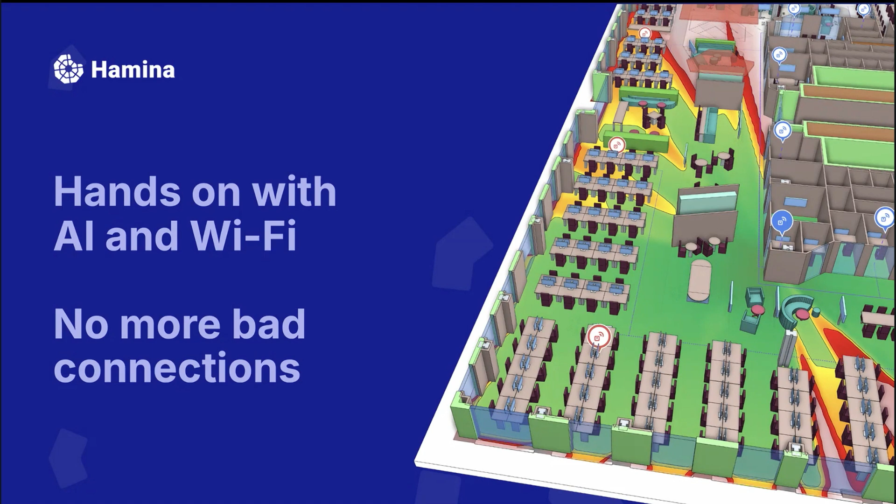We'll quickly talk about why it's so difficult to make really good Wi-Fi. Why are we seeing bad Wi-Fi? And a couple of tangible examples on how AI can help.

All right. Thank you for joining the ride. My name is Jussi. They call me Jussi, the Wi-Fi janitor. I hope you enjoy the show.

All right, so here's the good news. Wi-Fi almost always works. The Wi-Fi standard is very resilient, and that's why at your home, Wi-Fi typically works absolutely fantastically. So if you deploy Wi-Fi at your home, even if you deploy it kind of badly, against the window, or just tape it to the ceiling or under the desk, or just leave it in the closet, it works to some extent, right? Even at your home it can be bad, but home Wi-Fi is very easy, right?

But at your, let's say, local airport or hotel or hospital or warehouse, Wi-Fi can be really bad, and it can be catastrophic if the Wi-Fi is bad. At your home, maybe Teams cuts off, but if Wi-Fi fails at a warehouse, the warehouse pickers, whether humans or robots, don't pick up the stuff from the shelves anymore. Your deliveries don't arrive. So it's a bit more critical.

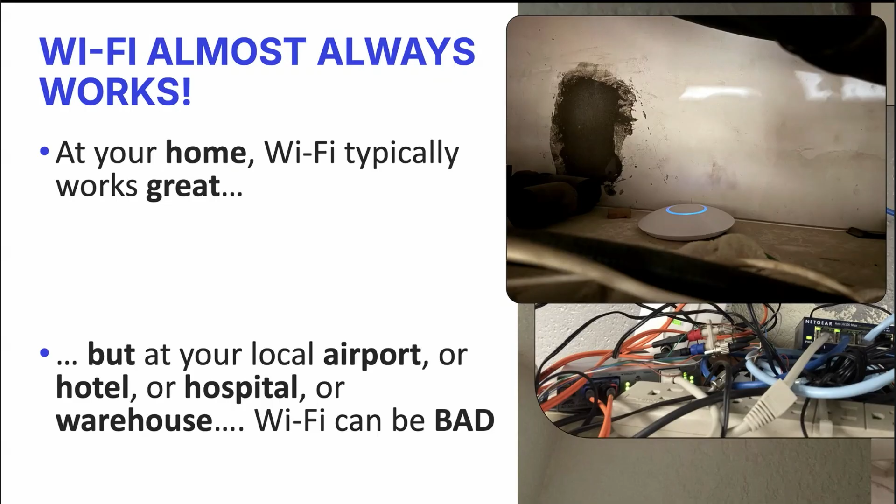And this is an actual picture. I was at the Canary Islands just last week, and this is what I found in my hotel. I could see access points nearby, but I couldn't really see them physically. Turns out somebody had put them inside the false ceiling and mounted them the wrong way as well. So that access point is radiating to the floor of the next floor and to my floor's ceiling. That's a true story from 2 weeks ago.

This is a bit earlier, a year or two ago, from Heathrow Airport. There's an ancient, like 2005 Aruba access point behind the television. Of course, radios and metal don't exactly match perfectly. So besides silly installations, what is it that makes enterprise Wi-Fi, larger than home Wi-Fi, struggle?

In general, the challenge is the larger the Wi-Fi network, the worse it typically works. A couple of causes: coverage holes is obvious. You need a lot of radios, like in hotels, hospital campuses, university campuses. You need hundreds, probably thousands of radios. You need to figure out where to place them, how to configure them. That easily causes coverage holes, especially if you're on a tight budget.

The other one is interference issues. Here's the bad news: your Wi-Fi network interferes with itself. Especially with today's Wi-Fi, Wi-Fi 7, Wi-Fi 6, the access points often are pre-configured from the box, especially home access points, to use really wide channels, just so that you can see that big number on your speed test.

But wide channels also mean a lot of interference when more and more Wi-Fi access points arrive in the area, whether it's more of your access points or your neighbors. If you're optimizing for huge speed test results, you're typically optimizing for a terrible user experience, because you're also seeing the most interference because of those wider channels.

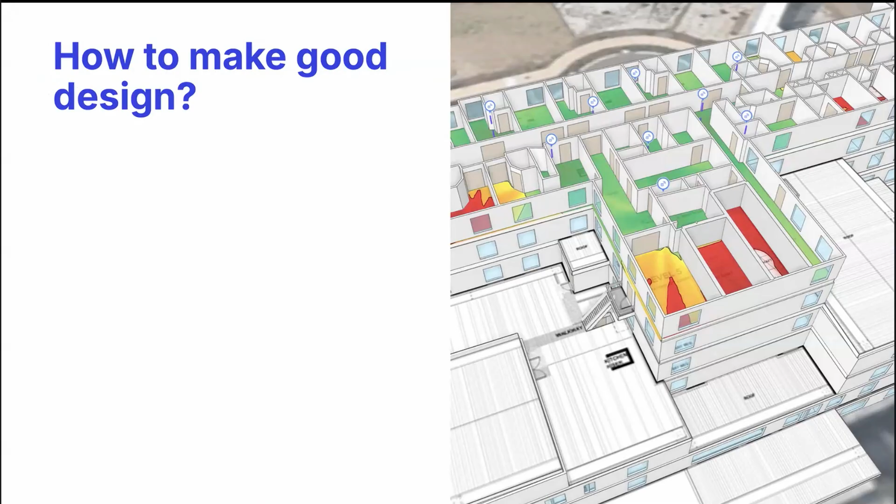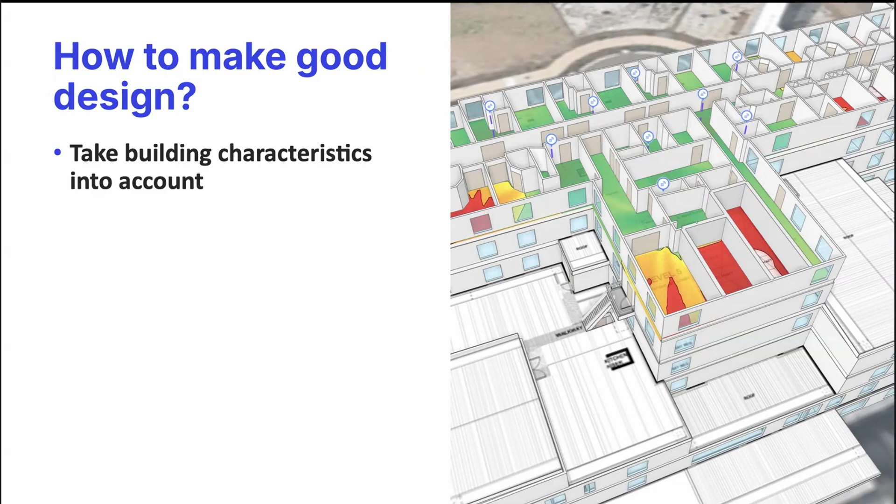So how do we make a really, really good Wi-Fi design? Simply put, we really take the building characteristics into account. So the walls and the elevators and the doors and things of that nature. And then we find ideal access point placement, so to maximize the coverage, minimize the interference, ensure capacity, and minimize cost. And then we appropriately configure and tune the network.

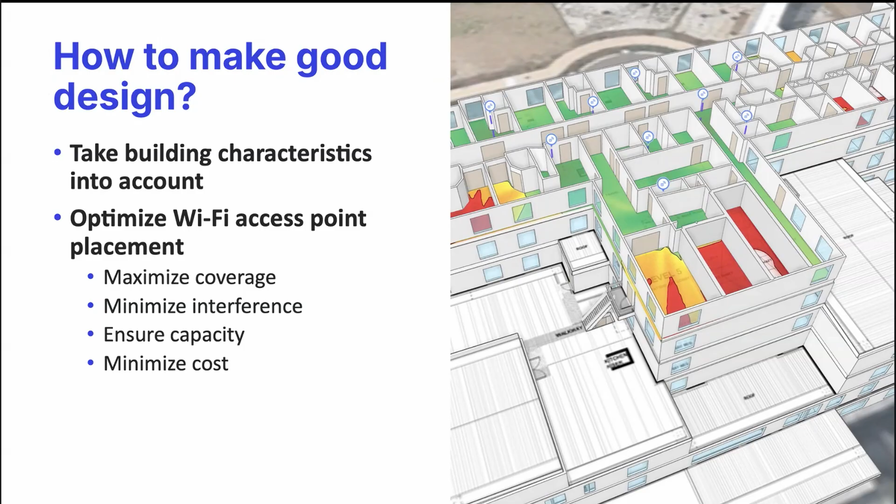Finally, we hopefully also validate the network on site. So we go on site and we make sure, doing walk testing, that the entire network works. All right. So this was the day in the life of a Wi-Fi engineer, still in 2024. Remember, we're talking about AI today and how AI can help. And AI did not really help a Wi-Fi engineer in his Wi-Fi design before 2024, not really at all.

So let's take a look at a couple of years ago. How did the Wi-Fi engineer do a design? You had to find some kind of floor plans of the facility, set the metric or feet scale to the floor plan so that we understand how much is 10 meters or how much is 35 feet on the floor plan in order to understand the coverage areas of the Wi-Fi access points. Then you had to use a computer program to manually draw all the boundaries on the floor plan. And this took hours and days.

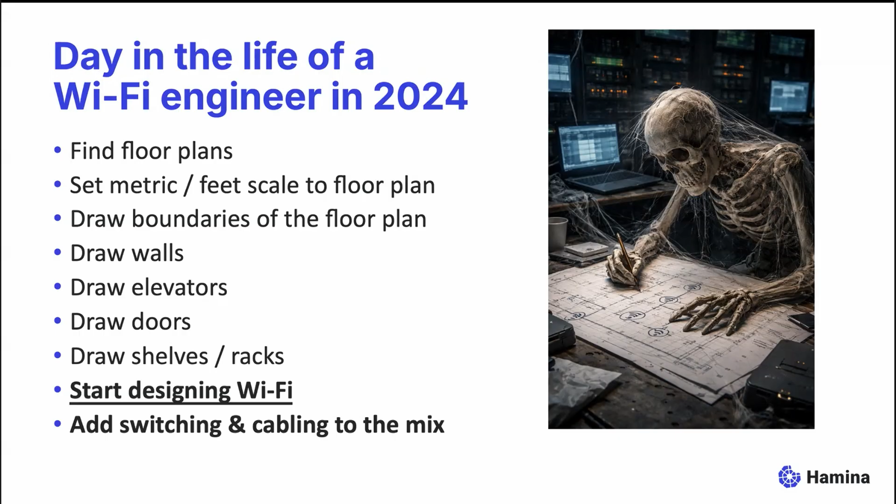So you had to draw walls of the area on top of the floor plan, and elevators and doors and shelves in warehouses and retail, and staircases and all of that kind of stuff, and define the materials for each. And only then maybe could you start designing Wi-Fi. This is hours and days later. Most of the Wi-Fi engineers' time went to these non-Wi-Fi related tasks. That doesn't make any sense. But then they could start designing Wi-Fi and the switching and cabling to match. Well, how can AI help here? Let's take a quick look.

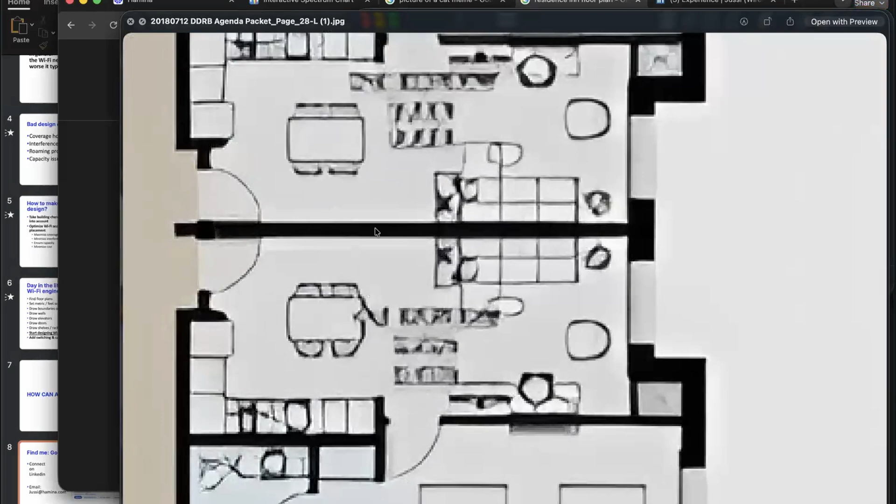All right, so let's take a look at some kind of a Wi-Fi design. So I went online and just put in Google Images "Residence Inn floor plan." All right. So this is what I found. Since I'm a Marriott guy, let's go with a Residence Inn. Let's say we need to design a network for Residence Inn by Marriott, and all we have is this advertisement grade, terrible quality floor plan of the building. So this is probably some kind of an advertisement floor plan or taken from somewhere. I don't even know, but it has nice logos and everything.

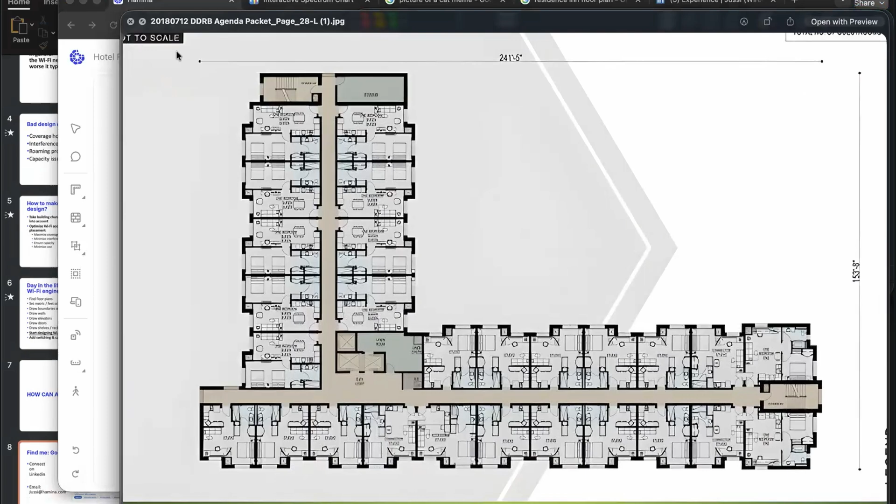But using this floor plan, in let's say 5 minutes, we would need to design decent quality Wi-Fi for this hotel. How would we go about doing that? Again, remember those manual steps that we had to previously go through. Well, luckily things have progressed. Let's see what AI can do for us. So here's the downloaded floor plan. I'm just going to take that and drop that on my web browser canvas, okay? I hope you can still see it. I'm just maximizing my web browser.

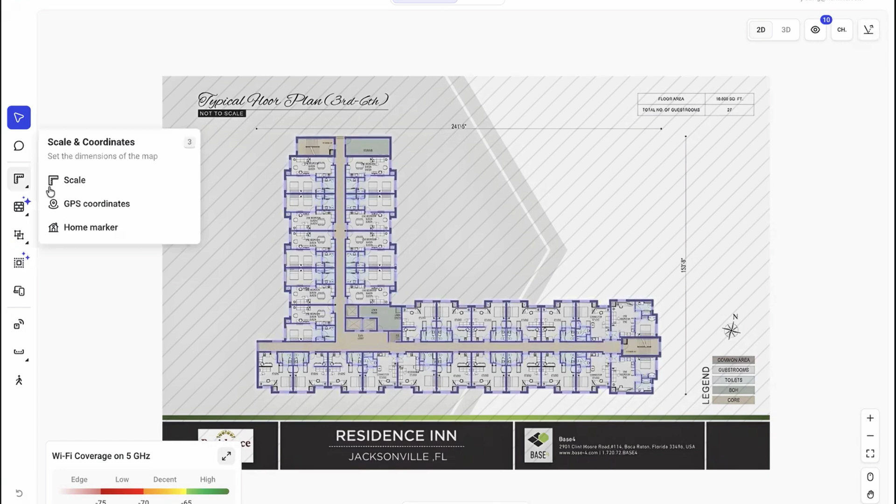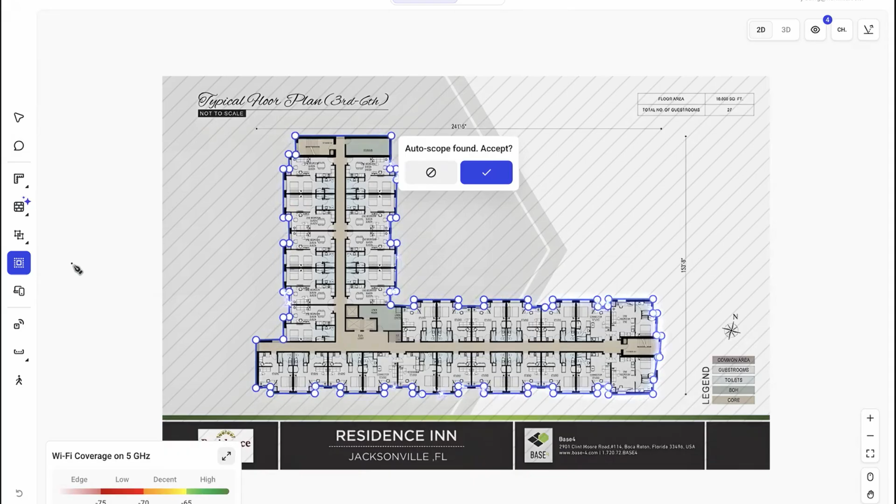What else did AI do? For Wi-Fi design, it's nice to understand what areas should I cover, typically inside of the building, and what areas not. Well, AI also did that for us. So that helps in understanding, like, the system will not even show coverage outside the building.

So your reports of the Wi-Fi design will look great. The heat maps will not show outside the building, things of that nature. So AI did that for us too. We call that a scope, like what's in scope, what's out of scope. You can of course manually edit that as well. For example, if you want to exclude the elevators from the design, we could do that too.

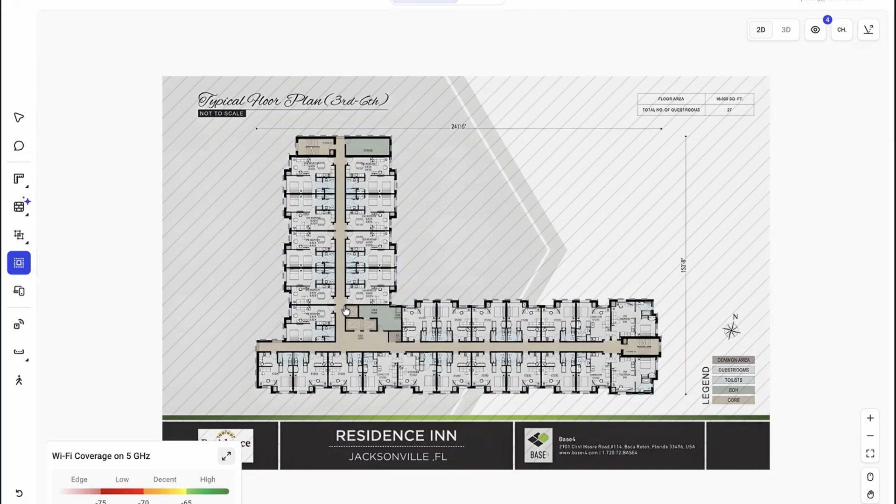Let's just do that for the fun of it. I'll just exclude them. There we go. The elevators are now excluded as well. So outdoor areas excluded by AI, and I manually excluded the elevators and did a terribly sloppy job at it. What else did AI do now? Okay, let's take a look.

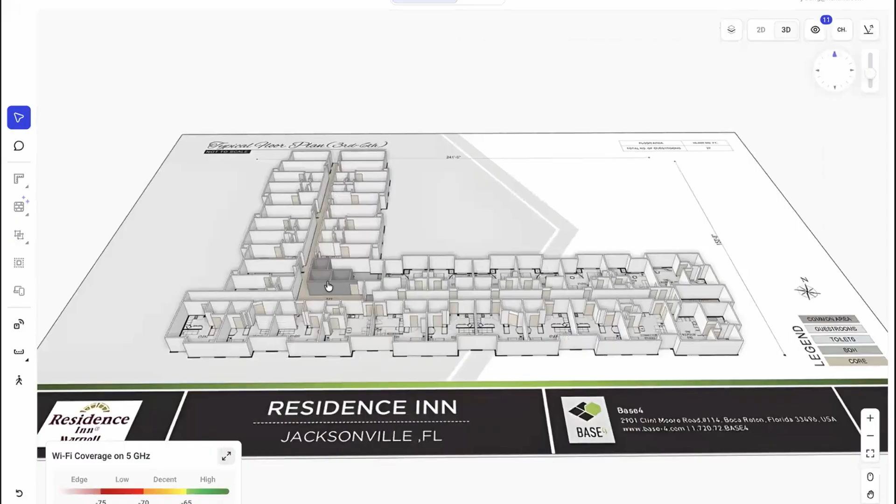AI actually also gave us the walls, the elevators, the doors, everything. And this is the holy grail, right? When we understand the walls of the building and the elevators and things like that, with this, we can then start to estimate what is the true coverage of, let's say, a Juniper AP45, which, by the way, radiates Wi-Fi into different directions like this.

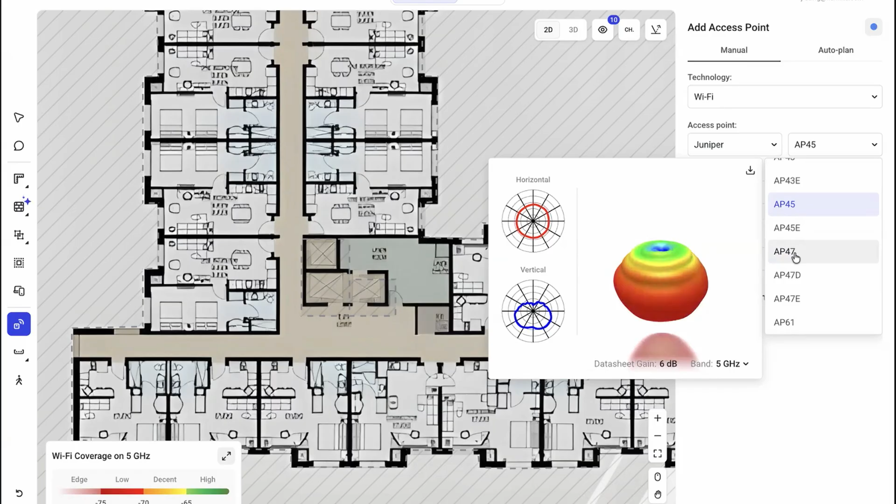Or the brand new AP47 from Juniper, which is more directional towards down than the AP45. Either way, let's take AP47 since that's newer. Now, look at how the Wi-Fi does not really penetrate the elevator, but it goes nicely through the corridors. It also goes through the drywall between the rooms quite nicely, but not nearly as much as in the corridor.

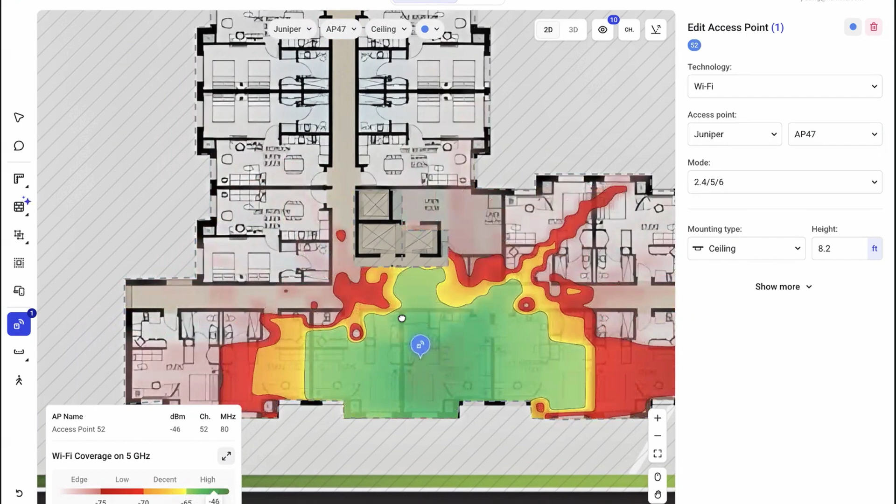And if we move the access point to the room, you can see how the walls make quite an impact here, but not as drastic of an impact as the elevator. Remember, we scoped out the elevator, so we don't even show signal there. If we want to bring the elevators back and see how the signal is in the elevator, we can certainly do that too.

All right, so see how much AI helped us here. It did the scale, what's in scope, it did the walls, the doors, the elevators. Could we now use this AI data to also make a decent design out of this network? Okay, let's ask the system. Typically, these kind of hotels would be done access point in every room or access point in every other room, or kind of a mixture, sometimes every room, sometimes every other.

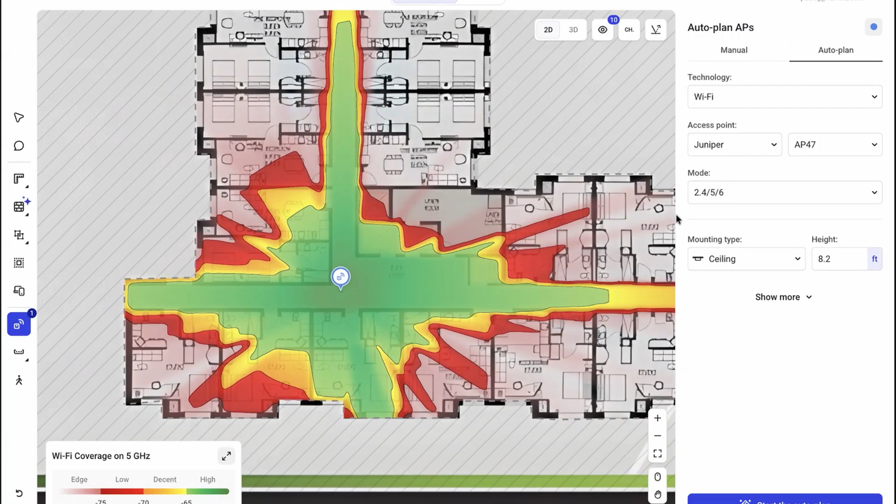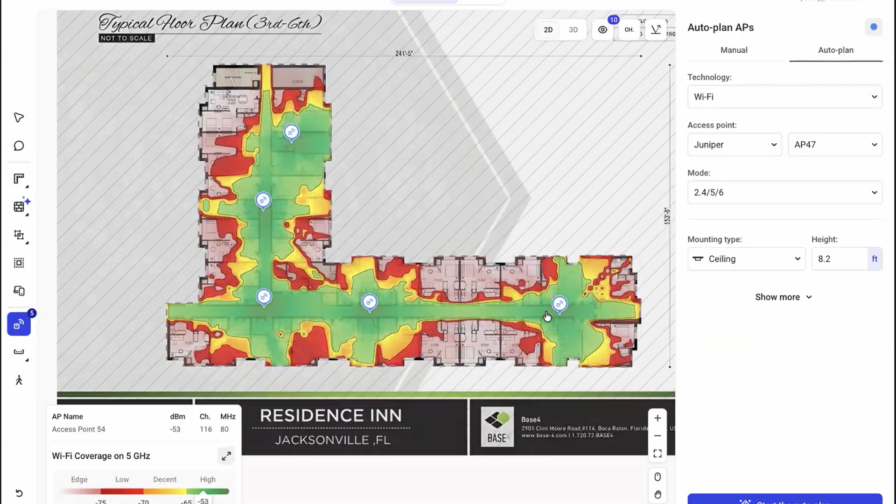Sometimes you see, I was just again in South Europe and I saw a design like this in my hotel. Some of the access points were in rooms, but most of them were in the hallway. And see what happens when you place the access points in the hallways. They don't really reach the rooms. So the Wi-Fi works great in the hallway, but it doesn't penetrate the walls to get to the rooms almost at all. That's not great, is it?

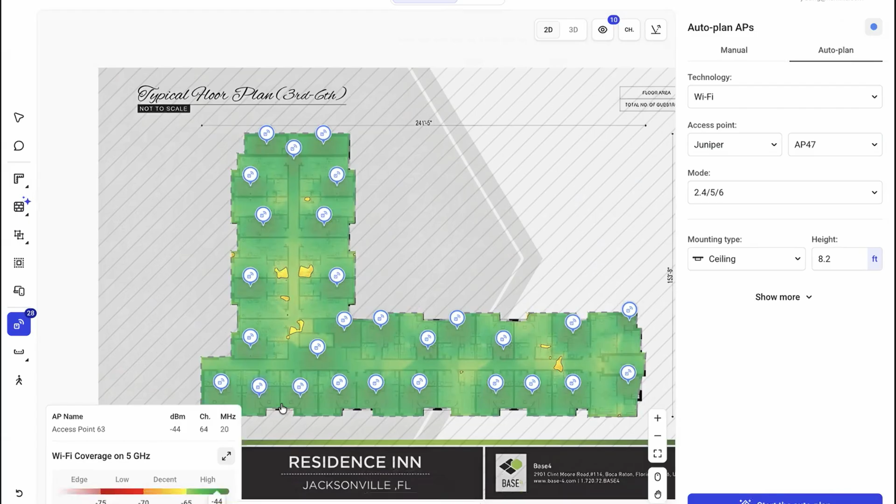Let's ask the system to suggest something to start designing the network. That's not bad at all. So, like I said, typically hotels are one access point every room or one access point every other room. And check this out. Let me just hide the heat map so it's easier to see. That's not a bad design at all.

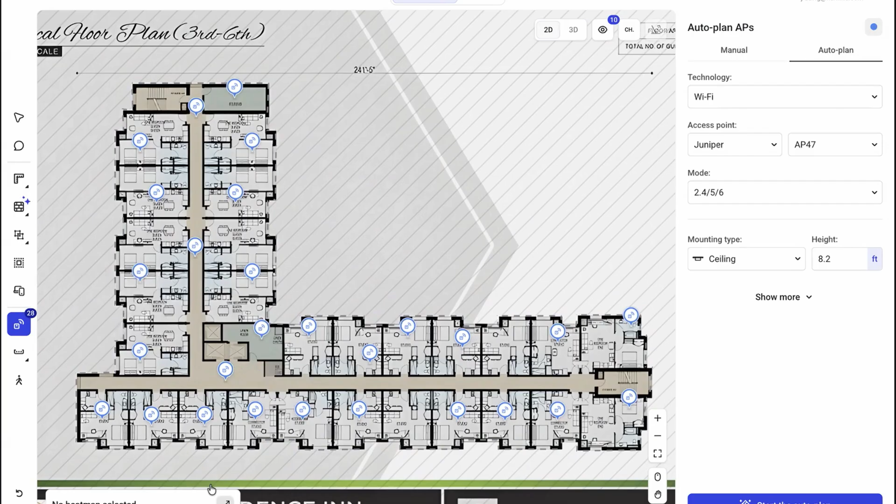And then we can, of course, manually modify the design. Let's say I want one in the hallway and I want one there when people get out of the elevator. Maybe move that access point there. But that's actually a decent starting point for us. Okay. So since AI helped us understand the building characteristics, it helped us make a pretty darn good design, okay? And then we can ask, do we have good coverage?

We do have good what's called primary coverage. So the best serving access point works great. Second serving access point works great, except in elevators and in some toilets, things like that. Not overly concerned about that. It's looking great even for the second serving access point on all Wi-Fi 6 and 7 on 6 gigahertz, and 5 gigahertz and 2.4. 6 gigahertz is only available in Wi-Fi 6E and Wi-Fi 7.

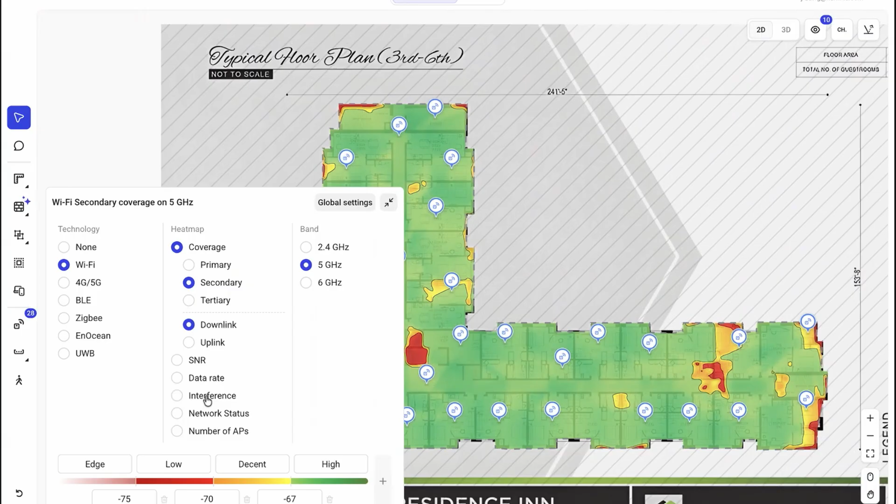And remember how your Wi-Fi can interfere with itself. The system even minimized the interference. There's absolutely no interference here. It optimized the channels of the radios automatically, see how they are all on their own channels, and when the access points would start interfering with each other, some of the radios were disabled that would hurt the system more than help.

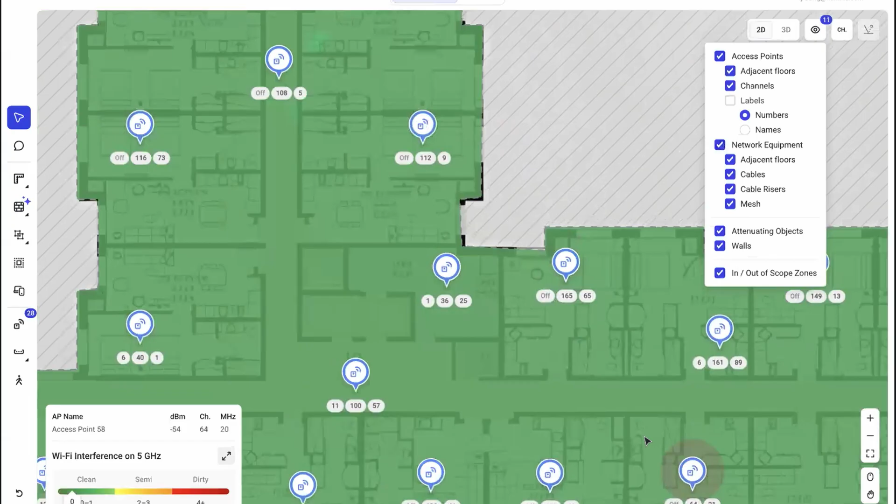That's pretty good. I'm kind of liking this design. Good coverage, excellent secondary coverage as well. No interference. Okay. And what about that roaming? Remember, we talked about how does the client device roam from one access point to the next? How would a brand new iPhone work when the high-end customer comes to Residence Inn?

That probably never happens. It's full of startup slobs like myself.

When the customer comes to Residence Inn, how is it going to work? We show the experience of the customer and the experience of the brand new iPhone, or if it's an Android phone, it behaves differently. If it's an iPad, it behaves differently. We show the experience of that device, day in the life of a customer of the hotel. Okay, that seems to be working pretty good.

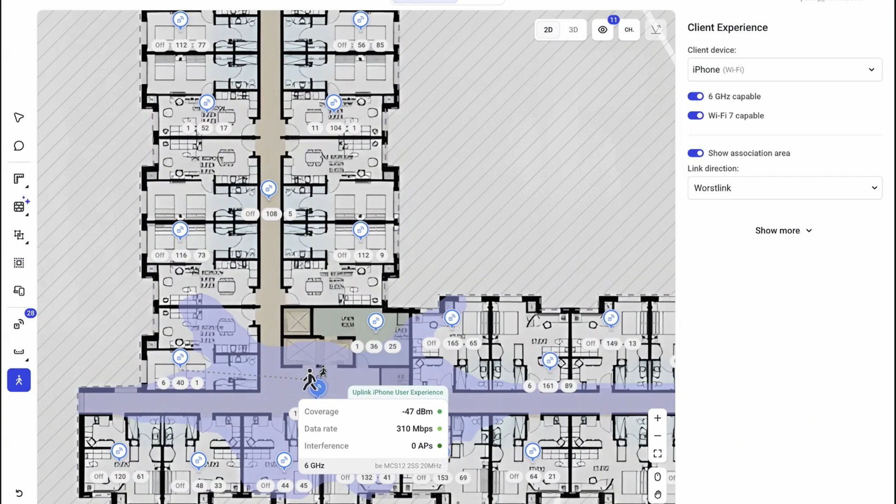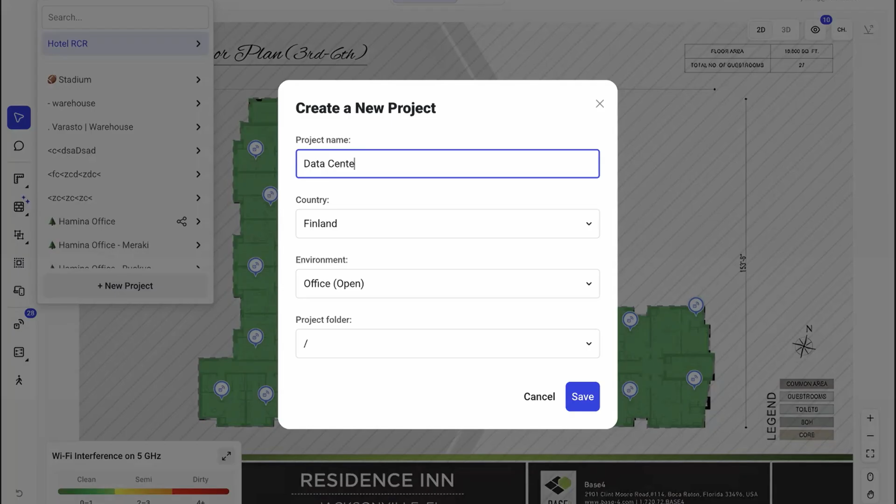So some might say AI is full of fluff and it's all still marketing hype when it comes to networking and AI. I tend to disagree. All right. So you could say that's an easy design. That's only a hotel. So what about something bigger? Let's do something bigger. We'll do a fresh start and we'll take a look at, I don't know, a data center. Yeah, or warehouse. Let's do a warehouse.

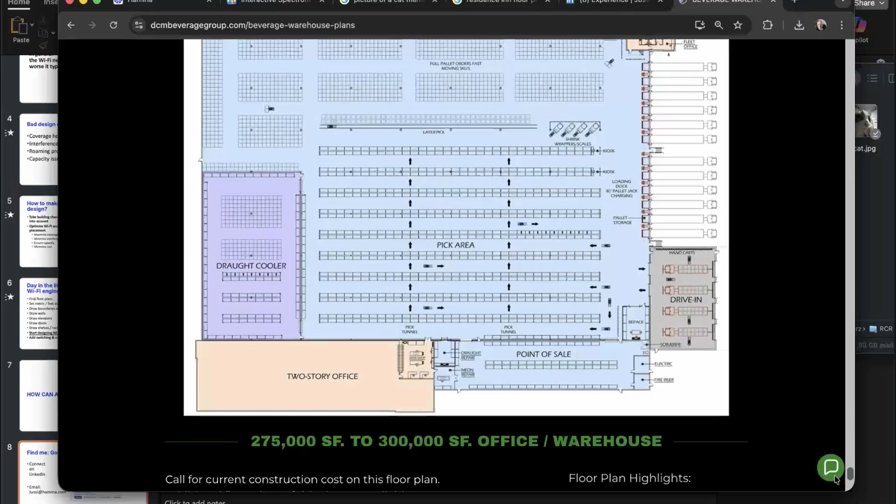So warehouse is slightly more complex, and also they involve things that hotels don't. Things like shelves and directional antennas, things like that. Can AI help there as well? So before this meeting started, I went to a site that has beverage warehouse floor plans. You can find a lot of floor plans out there on the interweb. So let's just save this beverage warehouse floor plan, and I will drop it in the canvas as well.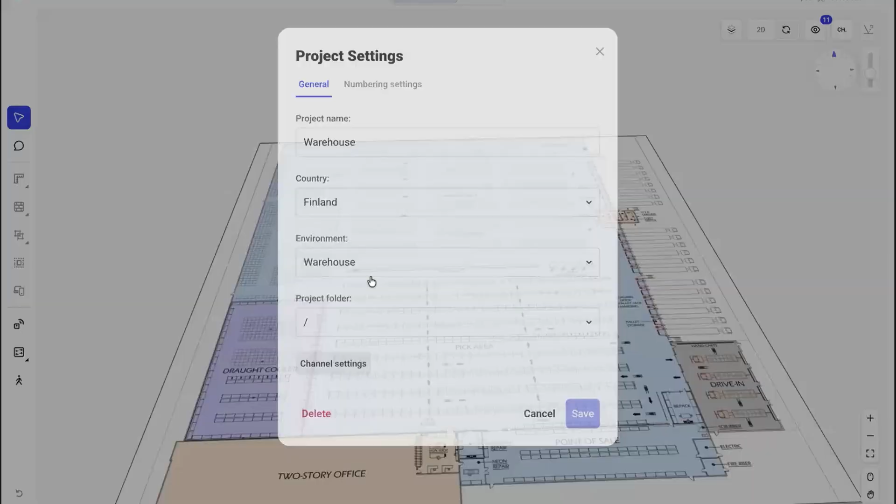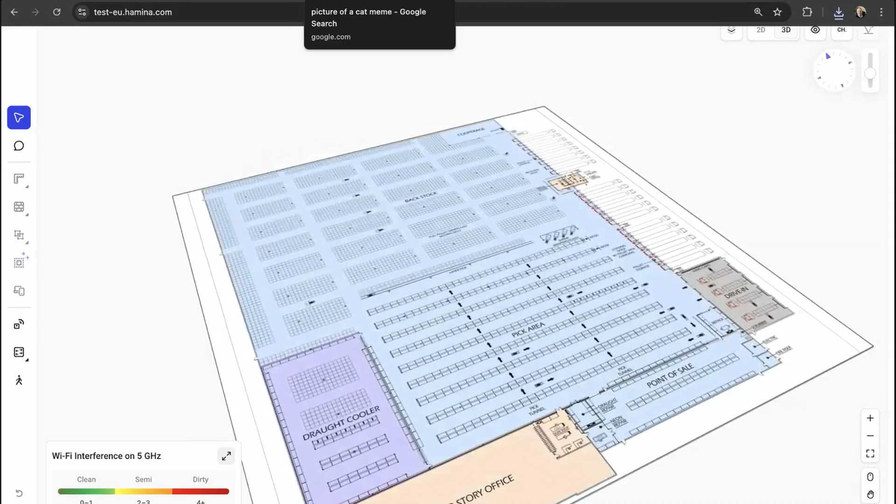Bam. All right. So there's the beverage warehouse floor plan, but did I set it as a warehouse? I sure did. So now the AI is processing it again. And the first thing I forgot to say is that the AI actually looks: is this a floor plan at all? AI can also determine that, and it's really good at that. And that's kind of a classical AI problem, if you will. For example, if you put a picture of a cat into the system, our AI will say, no, that's a picture of a cat. That's not a floor plan. Let's not even try to process it.

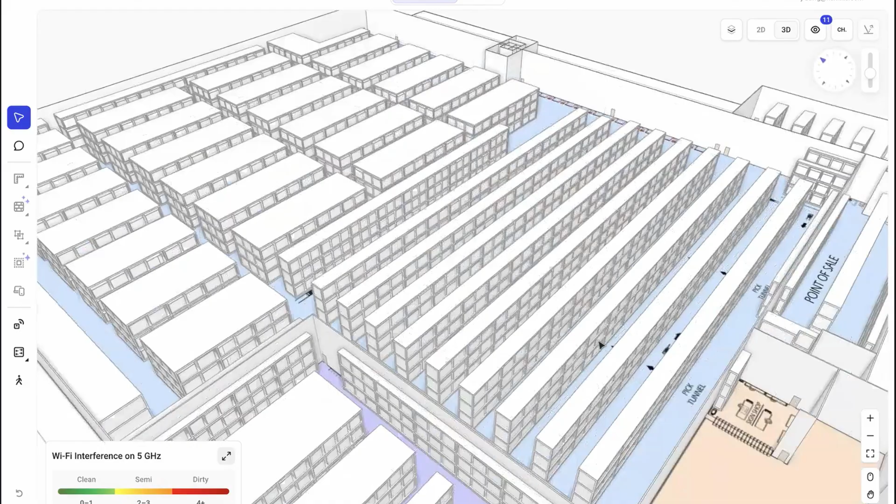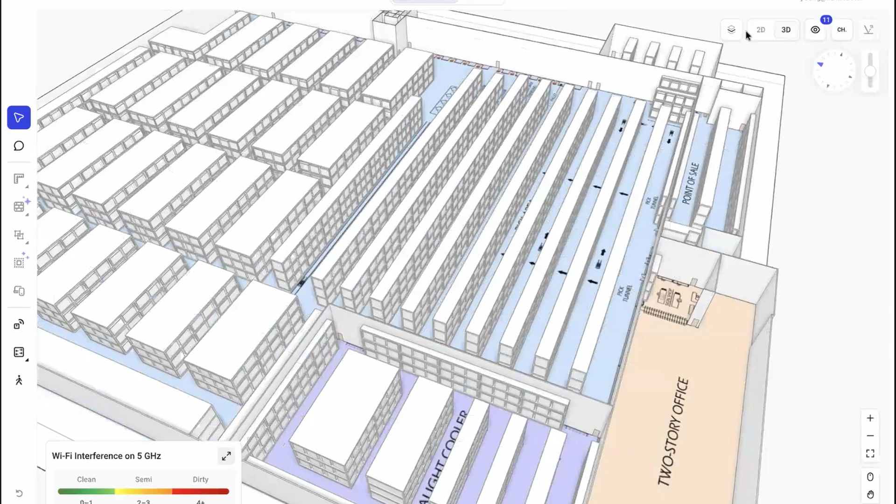Okay. And now AI has processed it and has found it is a floor plan. These are the usable areas. This is the scale of the floor plan. But it also found all of the shelves. Again, these are not CAD files or anything like that. These are simple JPEG images. I often take pictures of the fire escape plans of the hotels and use those. This was a simple two-dimensional normal picture taken from the internet. And AI automatically built a full warehouse three-dimensional model for us to do the wireless network design.

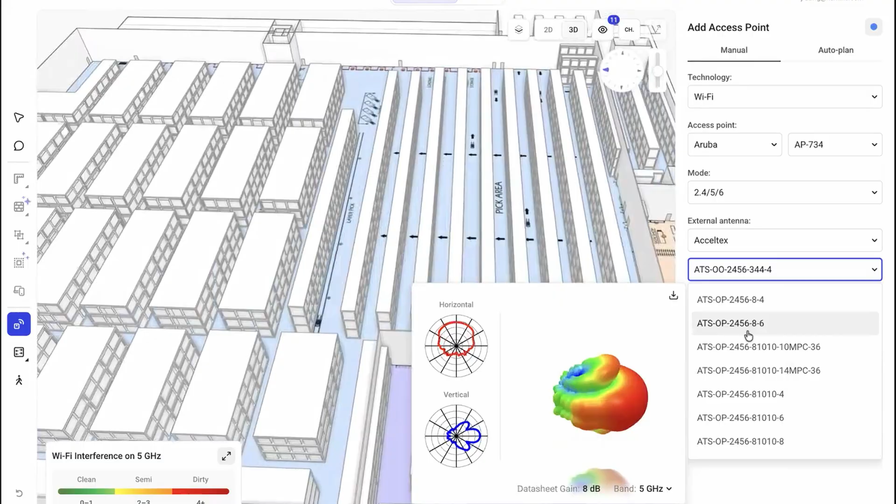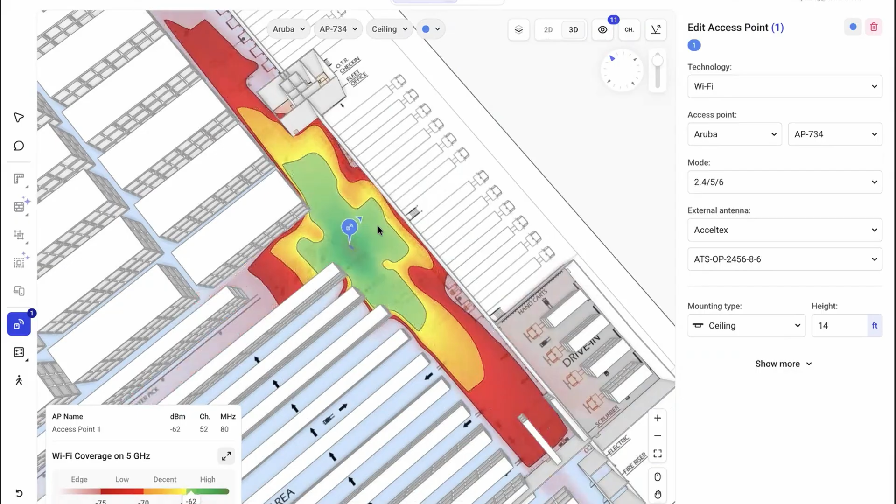And with this, we can use things like directional antennas, whatever we want to make an optimal design for this network. Let's say we want to use a battle axe type of antenna in here to make a beautiful design for this warehouse. We will put it on the ceiling of the warehouse at 14 feet, and we will look at coverage. Then we can start aligning the antennas and moving the radios. Maybe we align it so that this guy blasts along the hallway, and then we put the next one between the shelves, align it appropriately, and see how nicely that blasts throughout the warehouse as well. So that's kind of how you would design a warehouse.

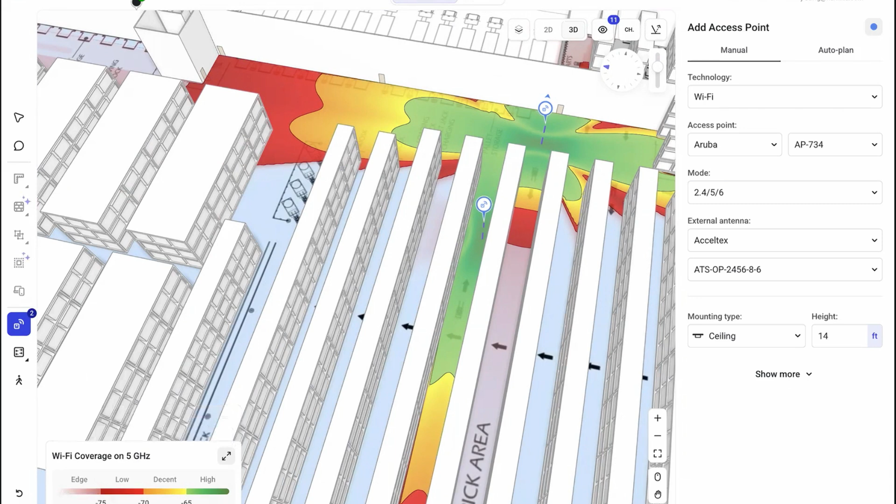But the thing is, with the warehouses, it's not computer aided in terms of the placement of the radios, alignment of the antennas, things like that. Nothing beats a Wi-Fi engineer when it comes to more complex design, and the automatic planning systems always need to be validated as well. Okay. So we can do warehouses, data centers, all of that kind of stuff. That's kind of neat. Let's go finally back to our original plan.

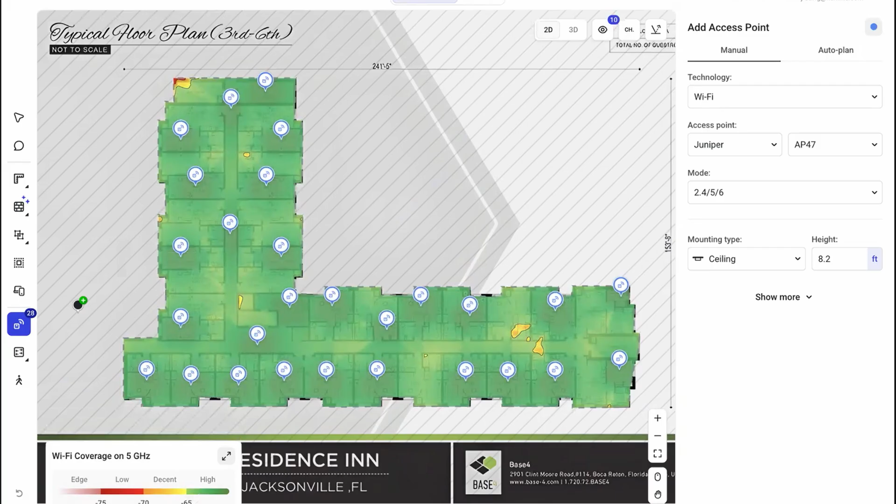We talked about what if we also wanted to do cable planning. Let's put a switch in this hotel floor plan, and we know that there is already an existing switch to connect all the access points to, and the switch also feeds power, obviously, to the access points.

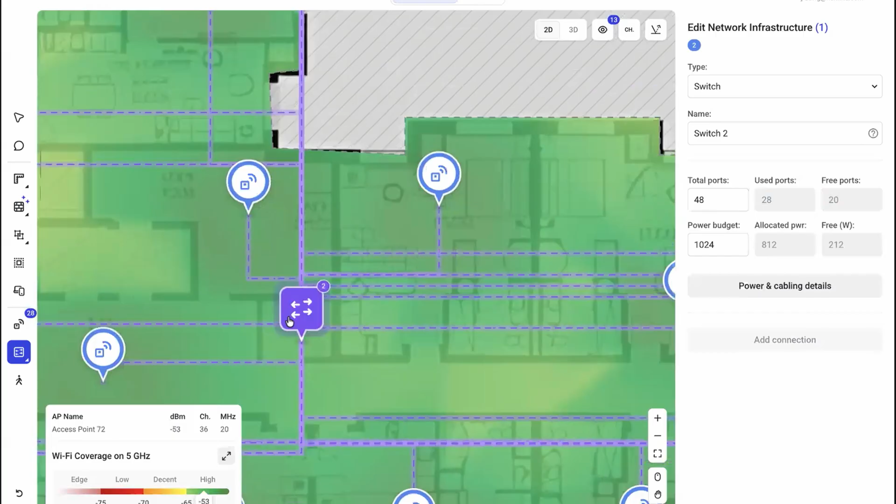So let's place that in the networking closet, and it's a failure. So clearly this switch, actually the old switch that was maybe powering the old Wi-Fi network, runs out of ports as well as out of power. So we will just upgrade the switch. No more exclamation mark, no more red switch. That's amazing. That's great. And now let's also do cabling.

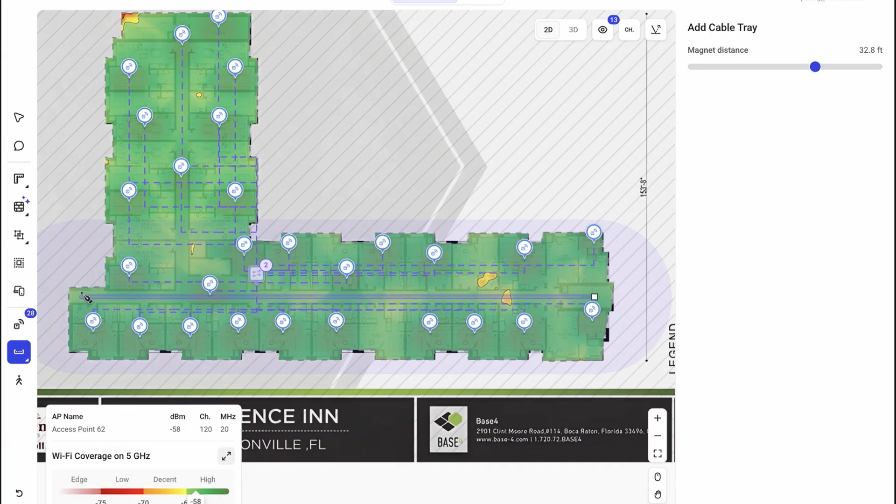So we can see cables are now pulled for each of the access points, but are we really going to pull the cables through the walls? Probably not. Let's just do cable trays here. I'm gonna say in this hotel, the cable trays, or the conduits where the cables go from one place to the next, actually go along the hallways. That's a pretty typical setup in a hotel. So we're gonna draw two cable trays on the hallways and see how beautifully now the cables are routed first to the tray from the access point and only then to the switch. Then we're pretty much done.

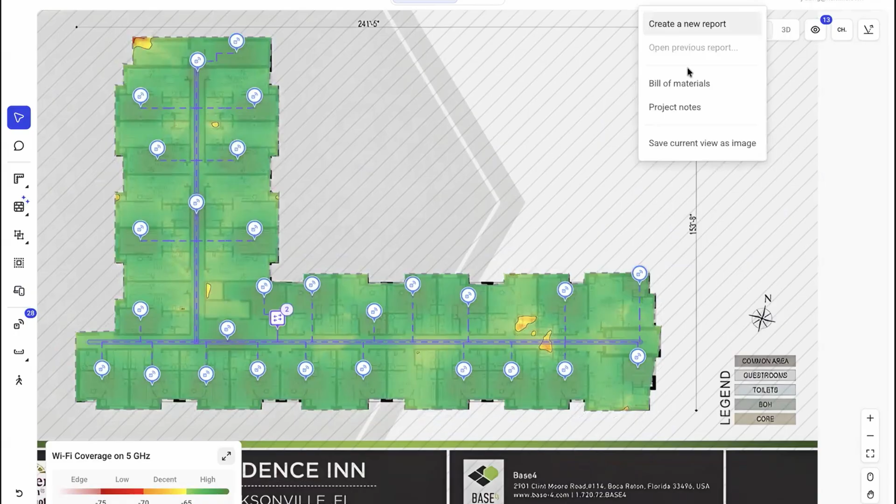We just ask the tool, give me a bill of materials. Okay, we're gonna need 28 access points of this type, all of them mounted to the ceiling. We're gonna need 1 switch, 48 ports, 1024 watt output, and this much copper cable for it as well. That's pretty good. Now I can just create a report of the simulation and fire this off to my customer.

Maybe I would add a logo, maybe I would customize the report, but the beauty is you can actually go and see my report as well. Why not? I'll just leave the bill of materials, and maybe I'll leave the access point placement and coverage and a couple of other views so you can check them out. I'll take out Bluetooth and Zigbee and all of that kind of stuff, because we do not need that at all. And we are ready to rumble.

What I'll do is I'll put, I don't know if you guys can actually see the chat here. It may be disabled, but if you do, that's great. Can Jeff or somebody help me? Can the attendees see the chat at all? Okay. Then I will not share that.

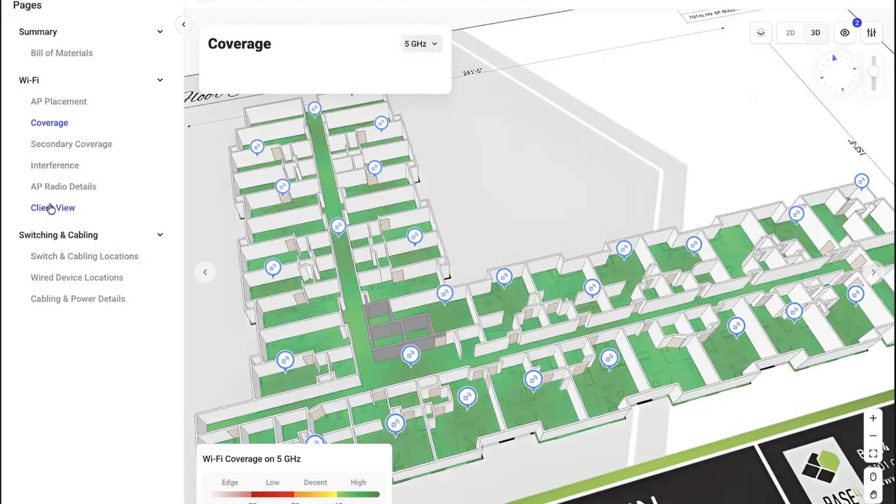All I will say is what your customers will get. You can create a PDF document out of it. But what's nice is your customers can also take the link that you send them and dive right into the project that you made. So this is your customer's view. You can annotate all you want, but your customer on their web browser can go into the simulation, see the coverage of the radios, see everything, even the client view of the system, so they can even walk the client around and see how it works. That's pretty nifty. That's all I have.